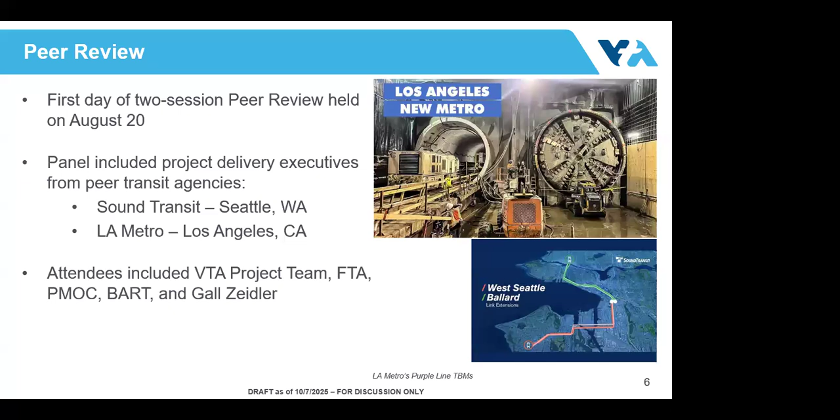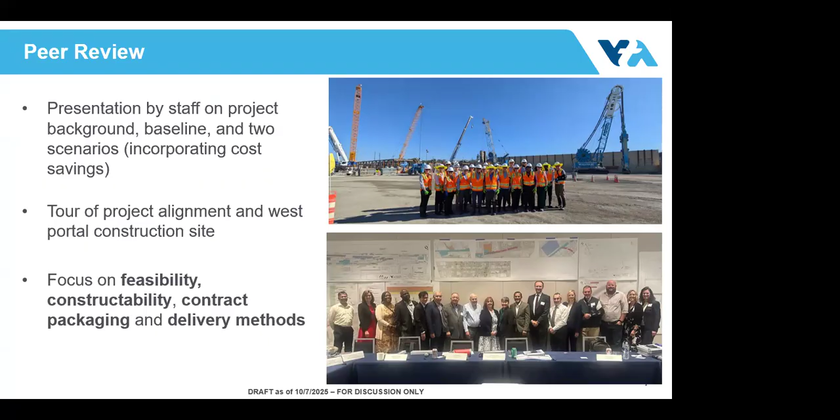We had a great time. We had presentations. We provided them with a lot of materials in advance. They were able to review and come with lots of great feedback. We spent a day and a half with them where they came the night before, and we were able to tour the West Portal site and go on a tour of the alignment. We walked through downtown, had dinner down at Gelatos, and then the next day, worked together in the office. You can see there on the bottom with lots of materials.

So I wanted to go through some of the high-level summaries of the feedback that we received there. This information will also be presented at our Oversight Committee meeting on Thursday. And in the agenda packet for the Oversight Committee meeting is the actual report, if you're interested in looking at it. And we can also send it to the group if interested, where that's linked on our website.

But as you may recall, we were evaluating two scenarios. Scenario one is a 53-foot diameter tunnel for the entire alignment. And scenario 1A was a 53-foot diameter tunnel from the west with a smaller 40-foot diameter tunnel from the east, where they would meet up somewhere just east of downtown.

So their analysis resulted in scenario one being the optimal path forward from constructability to feasibility and with fewer risks. We don't have to worry about where those two tunnel boring machines are coming together. Scenario 1A introduced the additional cost, an additional cut and cover box downtown that would then create impact where that meetup location would be, and increased risk and complexity.

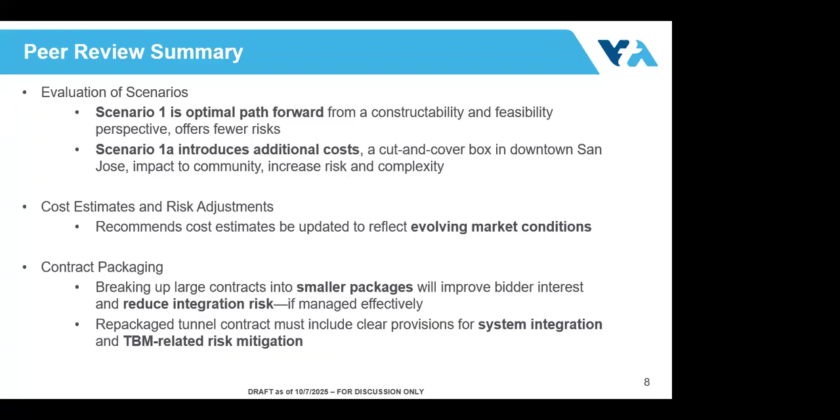They gave information and recommendations as it relates to cost estimates. As you can see here, contract packaging, breaking up into smaller contracts to reduce integration risk. Several different areas of feedback. And they also reiterated the importance of a strong working relationship between VTA and BART, which we agree is critical to the success of our project, and encouraged us to work together, maintain that relationship, and to continue the momentum with the construction underway.

So there'll be a more detailed description of this in our October 17th board workshop, where we'll have different representatives talking through in greater detail, but this will also be covered later this week.

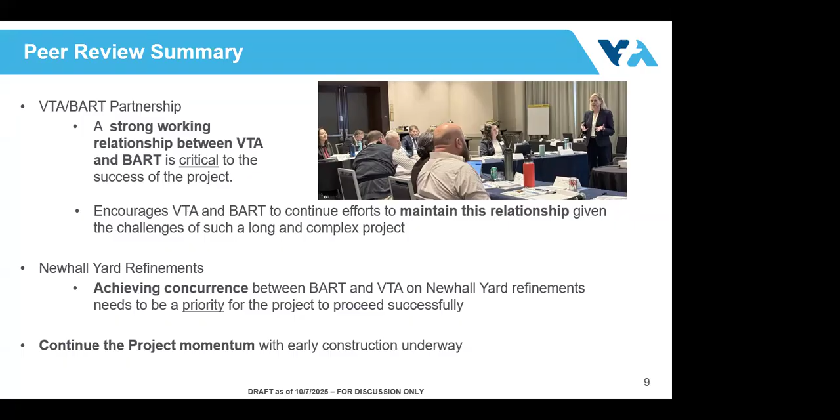I want to get into where we are in the cost savings status. We've been providing updates on cost savings we've been able to achieve. There's kind of four main areas remaining that we're still working through. There's some systems cost savings that we're still working through with BART.

The downtown station, as I mentioned in our interim meeting in August, and those of you who were able to come in September as well, based on where we had gotten at the time, we hadn't been able to achieve all the cost savings that were needed, and knowing that we were able to achieve significant savings by moving station infrastructure facilities above grade at the 28th Street Station and Diridon stations, that's why we ended up having to make that change here as well, because we needed additional cost savings.

So we're working through that, which Greg's going to talk about in a minute, working through refinements to the Newhall Yard with BART, and then landing on this project configuration, which path for the tunnel we move forward with, and then the resulting station. So we're continuing our engagement as it relates to those open items, and then today Greg's going to talk about the downtown station, and then I'll talk a little bit more about the configuration.

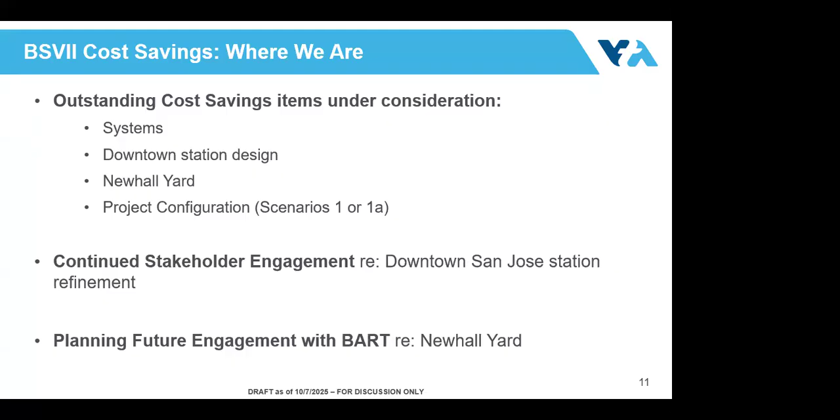Greg, over to you. Great, thanks. Thanks, Erica. Greg Thibault here. I've met most of you before.

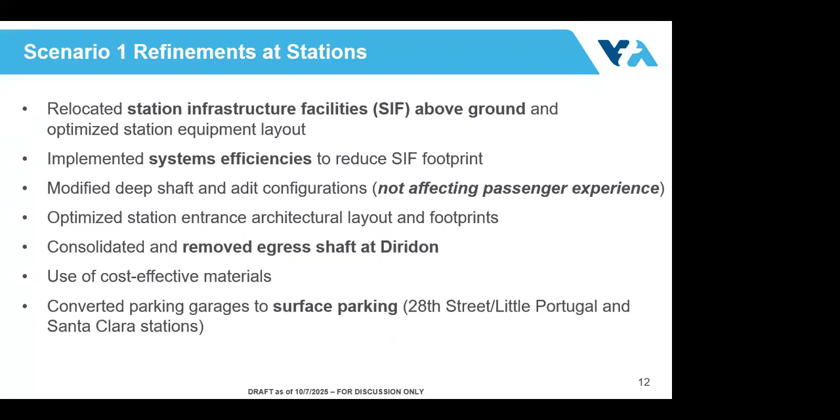So I'll talk a little bit about the downtown specific item. We have gone through and done a lot of these refinements at the various stations along the alignment, all four stations. Downtown was the most recent one that we've had to make some adjustments to. As Erica mentioned, we covered that in the last interim meeting. We do have some slides here to just reflect on that a little bit more. They are a work in progress. We do have a lot more work to do on the station design and the configuration, especially the finishes, and how those finishes look. But we've got some refinements in terms of the overall layout.

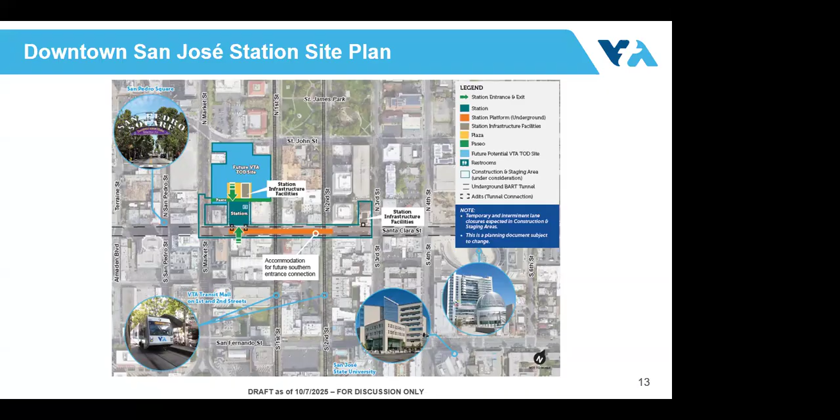So again, here's where the station exists. This is very close to where we're at today. The location of the station doesn't change. The station entrance from the ground level down to the tunnel does not change. The only thing we've been able to modify is some of the above grade areas, as well as eliminating the basement where we had a lot of the equipment previously. So that's one thing that I think I've got a slide on here.

So what we've done is essentially taken that basement structure that was on the north side of the station and stacked some of it on top of the existing head house. So the existing facility, we tried to make that as efficient as possible by adding some of that equipment right on top of the existing station. What that does do is add a second floor on the station, but it doesn't allow us to have that very, very tall roof that we had before, that tall ceiling structure.

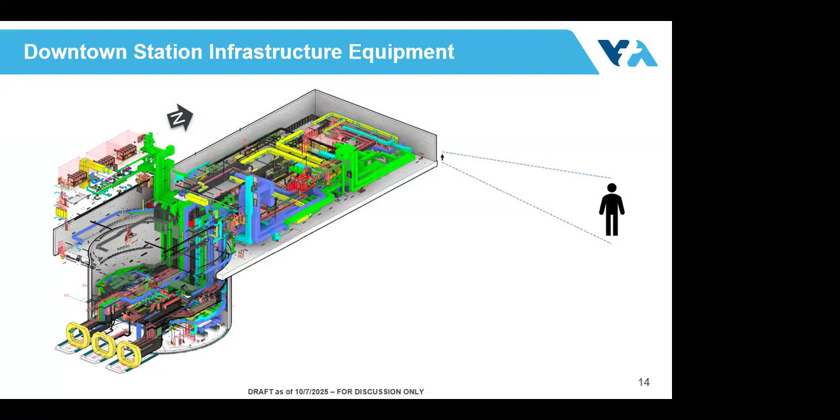So the next slide shows a little bit more detail. Again, this area here was that basement that we eliminated, which was a massive amount of construction just to build this. There was a lot of temporary works, soil nail walls, all of those go away. We bring some of that gear up to grade. So some of the heavier transformers and things come up to grade, and then a lot of other material and equipment goes on top of the station, and then we go with a 2-floor station configuration.

Again, the 2 escalator run scenario down to the concourse level does not change. So the passenger experience to go into the station and down to the actual tunnel does not change. We don't add a 3rd escalator. We don't make that drum any smaller. We just make the equipment and this station above a little bit more efficient by utilizing that same structural component to house a lot of this equipment that we used to have out in this basement area. So that's the fundamental change with the downtown.

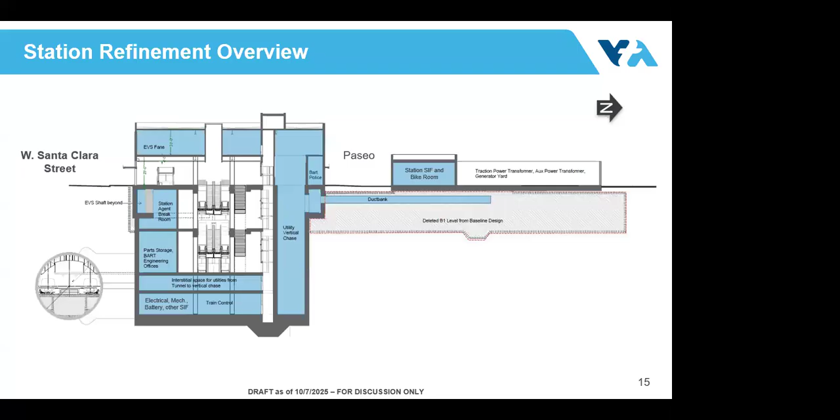Another thing we're working on right now is what this infrastructure facility looks like and where it would be located. We had previously shown it in a north-south configuration over here. We think it actually might be better with our future TOD development of the site to have it facing Market Street, and then have our public space on day one adjacent to this paseo. So this paseo opens up on day one. That's a non-drivable paseo, and that allows for passengers to come in and out of the station.

And then we'd have an adjacent public space as well as this at-grade station infrastructure facility. This is where some of that equipment that used to be down in that basement area would be relocated up to. We're still kind of working out the size of this facility. We're working with the VTA real estate team on exactly what that would look like.

There will be some public bike parking in here, whether it's on this corner facing Market Street or whether it's on this corner facing the station. We've got some options that we can work through on that. So those are some of the things that we're going to be working on over the next 6 months.

Yeah, Greg, are you thinking about still having a park or something above the? So that's when we had this station infrastructure facility in the middle. We really thought that a podium deck above would be the right solution, and that would be built out in the future by the development team who came in and did all the development here.

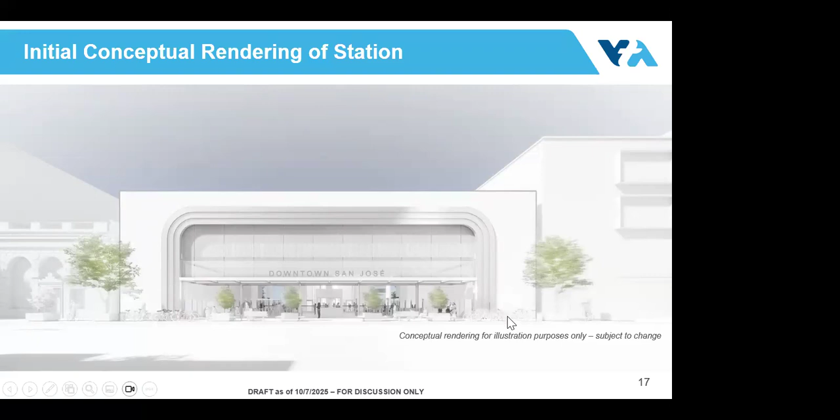Right now, the ceiling itself is about 18 feet or so from the ground level up. We're looking at whether or not that's the best distance. The room we're in here, I took a measurement, is 23 feet. So this is a pretty expansive room. 18 feet might be 5 feet lower. So an 18-foot ceiling is going to be a pretty substantial ceiling. Getting it a little bit higher is just going to increase the cost of the program. So we've got to be very diligent in what makes sense.

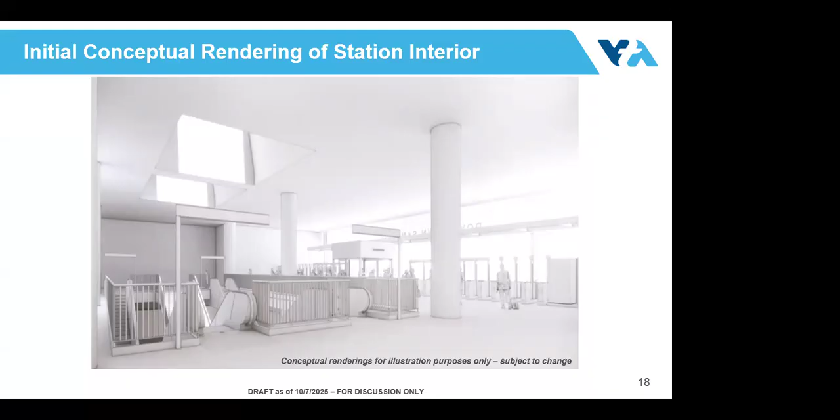So we'll take the next 3 months or so to hone our pencils, get everything a little squared, a little bit more refined, and then we'll come back to this group and be able to talk to you all about some of these decisions on the station facade, some of the materials, the exterior treatment, some of the things that we discussed previously. But now that we have this new vision, do we need to make some adjustments to those again?

What's the Milpitas height? Do you know by chance? It's pretty tall. Maybe it's in the 25-foot range, something like that. I think it's very tall because it's kind of a dual level. So there's one ceiling, and then there's the skylight, which is 5 or 6 or 8 feet taller.

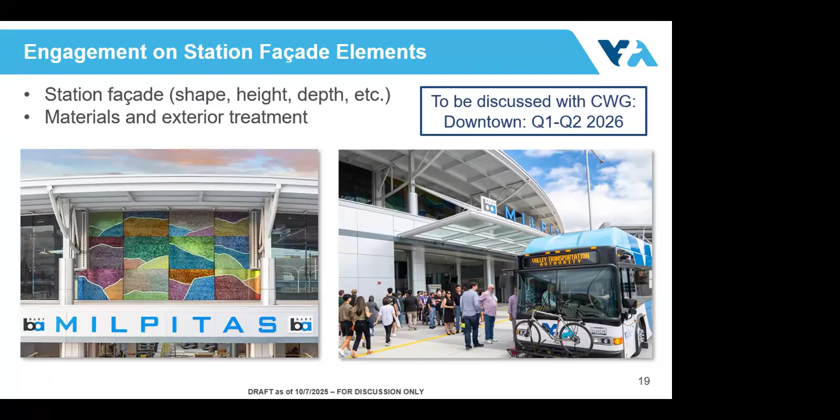Right. Very difficult to maintain. So that's one of the downfalls of having those things. But anyway, Milpitas is a pretty tall station as well.

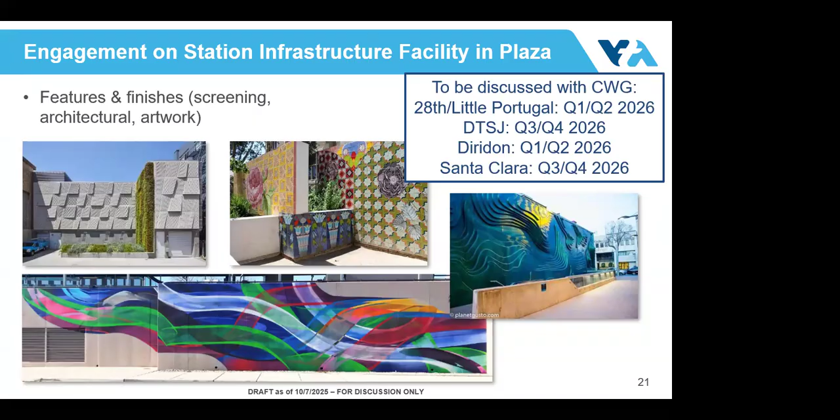I'm a little bit concerned now that I see this, with the impact of Market Street. You just got nothing active there. It could be pretty, but this is the downtown crossing, Market, Santa Clara. Within that block, you can have just not active space.

If you go back to the opening day slide - yeah, you get a good TOD, you can. It will be TOD adjacent, and then that green square is the bike parking facility, right? So there'll be that activation there, and then there'll still be the properties further to the north and south of the Paseo, as well as across the street.

Look at the photos, they look like they're much longer. Yeah, those are just examples of treatments, so that's kind of hard to show.

So the Paseo, I think, is about 35 feet wide. This would be about 60 feet or so, and then if we have this activation zone, you're really only looking at about 25, 30 feet of kind of a facility. And there would be some doors there too.

That's where we're gonna have some access points, and whether or not it is one flat wall, or whether there's some reveal, we can work through all that.

I'm having trouble visualizing this. Where is the corner across the street here? Where the bike parking thing is?

Yeah, so this is the identified place for a public bike parking facility. Greg, I think he's asking where the street corner is. Oh, the street corner's right here.

Okay, yeah, so here's Santa Clara. Here's the Santa Clara sidewalk. Here's our main station entrance. And there we would have a secondary entrance back here that all spills out into the Paseo. And then, as people come in, they can park their bikes here, walk in. There will also be some at-grade bike parking areas here, and then kind of an open, flat area here with probably some planting and planters and some different things like that.

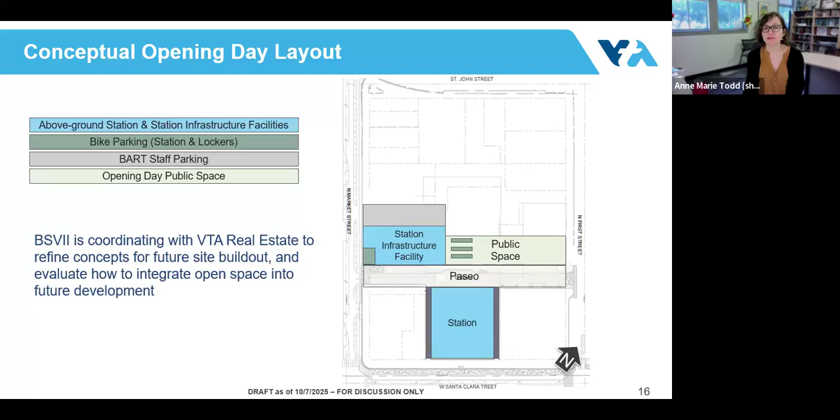I'm envisioning how I get there with my bike, coming from the south side, down First Street on the left-hand paseo. Santa Clara is horrible for bikes, right.

Actually, it's been some time since we talked, but Market Street is going to have a two-way bikeway, so that will be a new bicycle entrance into the block and into the station. So it makes a lot of sense to have potential bike facility.

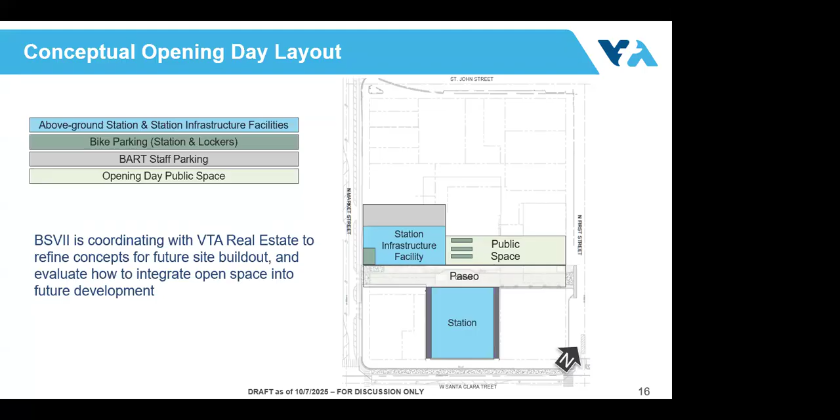But Santa Clara, San Jose is working on a vision for Santa Clara in the future. We don't know what that looks like yet, so I'm okay leaving that just for us. But yeah, Market's going to become a much better bikeway in the future.

What kind of traffic disruptions do you see along Market and North First Street while this is happening? Do you mean during construction, or during operation, or even after it's done?

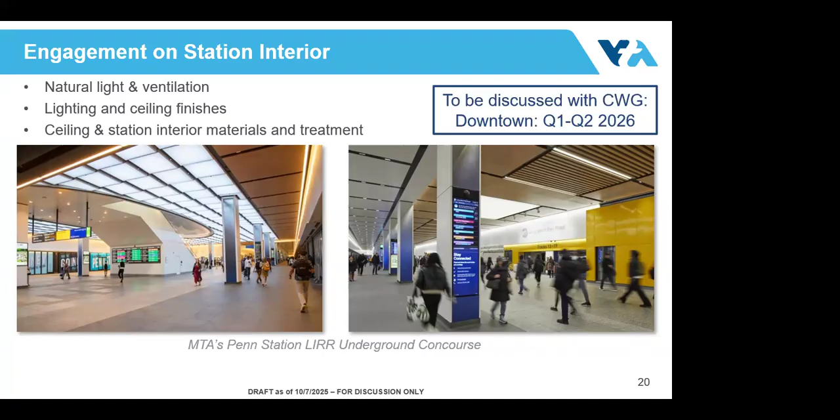Before we start construction in each project area, we develop a construction transportation management plan where we evaluate what the impact will be to traffic during construction. That's something we involve the community and stakeholders in. We started for the Downtown-Diridon area and we'll be picking back up again soon. That's where we'll get more information about during construction.

There is no BART patron parking here, so folks coming to the station are anticipated to either be transfers from rail or bus, or pedestrians and bicyclists, majority.

Is there a big drop-off place, for dropping people off at the station? We are working through where that is. There are some ADA pickup drop-off areas, but there is not a very large public drop-off for the downtown station. The 28th Street station has a lot of pickup drop-off, but downtown, no.

You can always park at the city parking garage right across the street. Plenty of parking over there, real close by.

The other thing is landscaping and hardscaping around the station building. This is just the downtown area. At Downtown Berkeley BART Station, we show kind of what could be configured there, trying to activate it as well. The plan is to continue engagement with this group, the city, BART, our stakeholders, and the VTA real estate team.

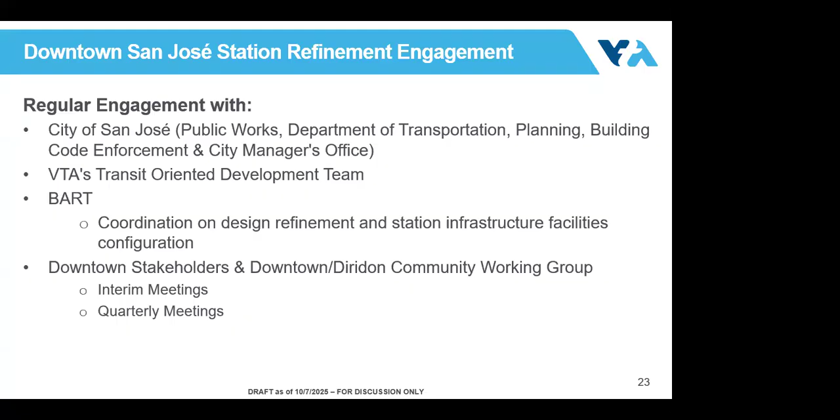Is landscaping and maintenance all VTA or BART? It depends. The drip line of the facility, everything inside the drip line, will be maintained by BART. Everything outside is by VTA. The drip line is kind of the roof line, the overall envelope of the building. Everything inside is BART's wheelhouse, and the things outside are VTA's maintenance staff.

Sidewalk, paseo, plaza - yeah, plaza, right.

Given that the pressure on the budgets is so intense, you've made a lot of great progress in reductions that are simply necessary, but you tried to elevate it. I'm very grateful for that. The confirmation that we're sticking with single large bore is absolutely essential to preventing destruction of downtown. There's a lot of price paid to keep the project on track, and you're making progress on that, so thank you. Yeah, it's a balance.

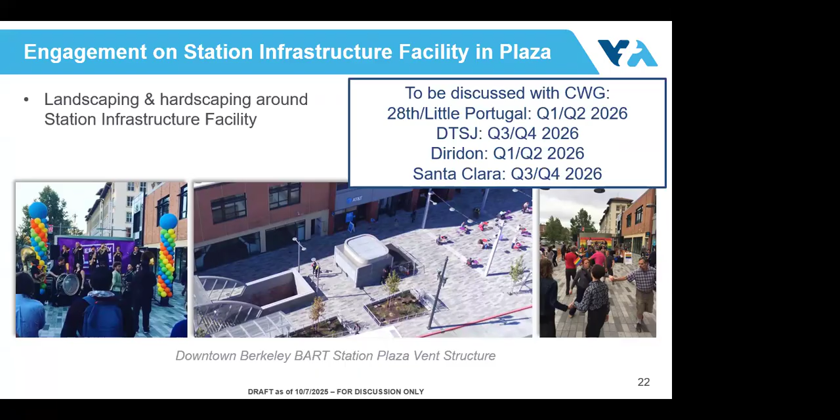I think Erica's going to talk a little about the two scenarios. We talked about the downtown station, and now let's spend a few minutes on the configuration decision we have to make and why that matters. We're going to decide between scenarios - Scenario 1A, which I'll show an image of in a minute, I described earlier.

Scenario 1A is concurrent. Once we make this determination, we'll be able to advance the project to our 60% design. It affects how we approach our tunnel construction, which is critical path, our ability to stay on schedule to maintain our projected revenue service date of 2037, and it provides flexibility on how to proceed if the FFGA is delayed by the current administration.

So we've been doing a lot of analysis, and we've presented to the board and to the community working group here on what the project team analysis has been. We went to the peer review. We're having that report out as well, and we've been engaging with Gall Zeidler, project management oversight committee's subject matter expert on all of these things to review with him as well.

Is the peer review the same people you mentioned earlier, the LA, the Seattle? Yeah. And who is Zeidler? Well, Zeidler is a firm that works for VTA's BART Phase 2 project management oversight committee, so it's a subset of the VTA board. So they facilitate the peer review meetings? They did not facilitate the peer review. They were there. They participated in the peer review, but VTA led the discussions of the peer review.

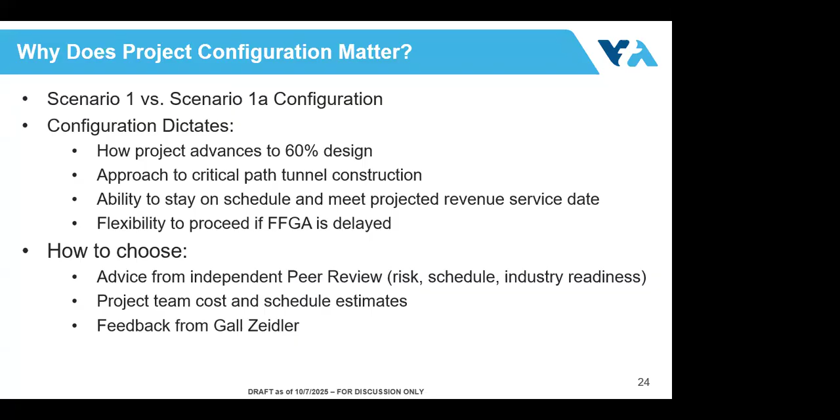So they participate as an independent subject matter expert for the board. Their contract is managed by our auditor's office.

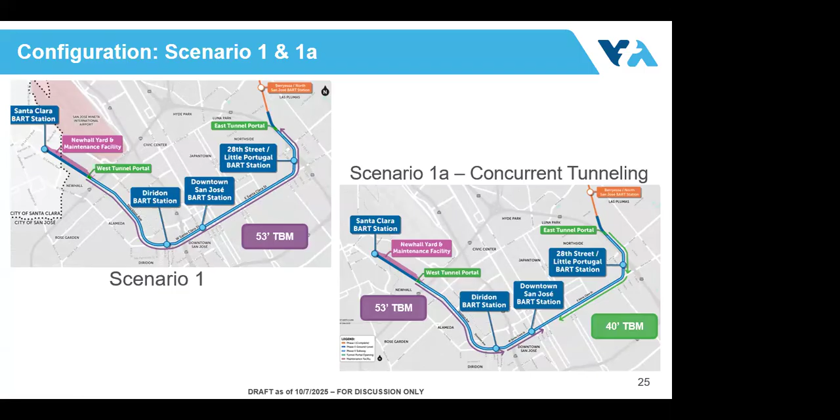Yes, thank you. And so reminding us of the two scenarios, scenario 1 is a 53-foot diameter tunnel the entire way. Scenario 1A is concurrent tunneling with 53 feet from the west and a smaller 40-foot diameter from the east. I know for a couple of meetings we've talked about what scenario 1A all entails, but wanted to pull it all together and remind us today.

So with scenario 1A, some additional construction considerations we have to take into account, which I'm going to talk about more in just a minute, is we have a new east portal launch structure that would have to be built. We would have to acquire an additional tunnel boring machine. The 28th Street Little Portugal station would become a large cut and cover structure to construct because of the smaller size of the tunnel there. And there'll be a retrieval shaft at the meetup location of the two TBMs somewhere along Santa Clara Street.

Retrieval spot, 7th Street? Yes, and I'm going to get to that in just a minute. So yes, somewhere between 3rd and 7th. Yes, and so...

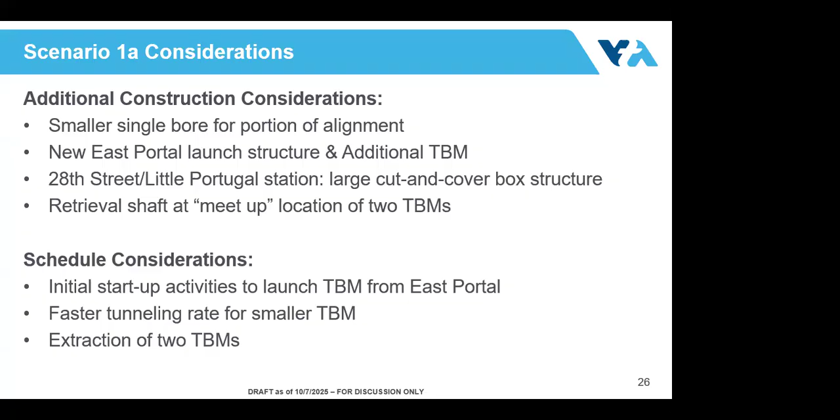Okay, and then as it relates to the schedule, there's initial startup activities that have to be done in order to launch the tunnel boring machine from the east side. There is a faster tunneling rate for the smaller TBM, but with one tunnel boring machine, you would drive the entire tunnel and extract the TBM at the end at the east portal. But with two, you have to extract both at the meetup spot, which then has the surface impact. So we'll never actually see the TBMs? They'll be underground all the time once they start working, right? Correct, yes.

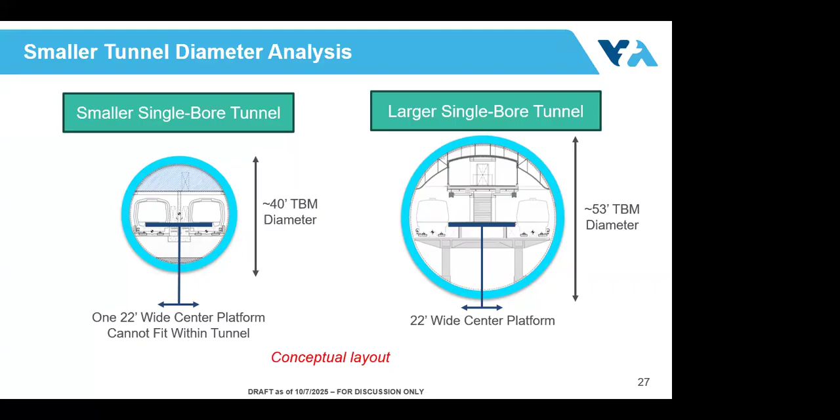So just to remind us of the tunnel diameter, the larger single bore tunnel on the right is where the platform fits within the tunnel. On the left, you see the platform doesn't fit within the tunnel, which is why we have to do the cut and cover structure for 28th Street.

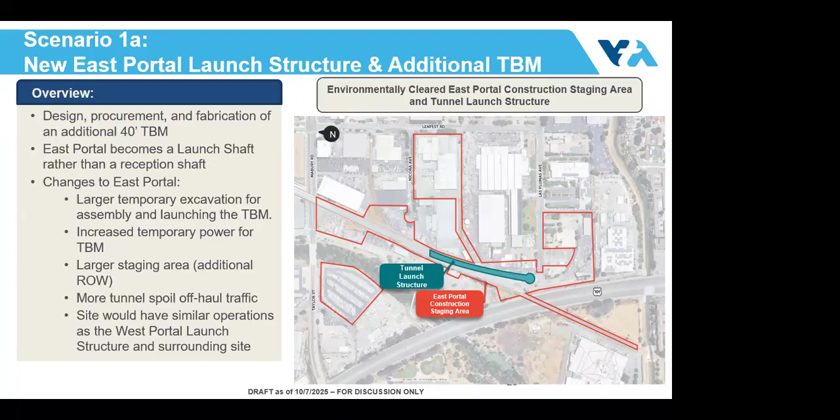So you can see we would need additional temporary power. We would need a larger excavation area, more staging area. We have more tunnel excavated materials that we would have to off-haul, and we'd have to bring the site up to what we're doing right now at the West Portal to prepare to launch, and design, procure, and fabricate an additional 40-foot tunnel boring machine.

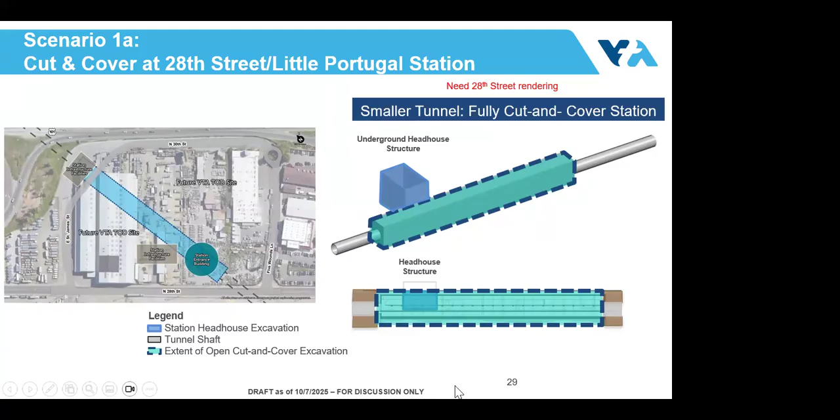So the rendering, the isometric view over on the right side, shows an example of an underground structure in that this is not 28th Street because it's not on top of the tunnel, but you can see in order to construct, there's a much greater amount of volume that has to be dug. It's a 700-foot long hole that you have to dig versus just the shaft and then straight down with the larger tunnel. So it's much more material, takes more time with this cut and cover construction.

Where does all the dirt go?

So that's something that we're working through, where the excavated material goes, depending on the material that's excavated from different stations or different facilities, not the tunnel. It's evaluated whether it's clean enough to be reused or sent somewhere else. The material that comes out of the tunnel is mixed with a bunch of conditioners in order for it to be able to go through the tunnel boring machine. So it comes out the consistency of toothpaste, and so it's harder to reuse that material. So right now there's extensive studies going on if that's something that we can reuse for the Salt Ponds Restoration Project, or different locations where it's taken to different landfills. So that's something the team's evaluating right now.

Do you have an idea how many tons of earth will be moved? I think it's 3.5 million. I think it's yards. Yards. Yeah, cubic yards. 3.5 million yards.

Yes. ChatGPT to convert that for you.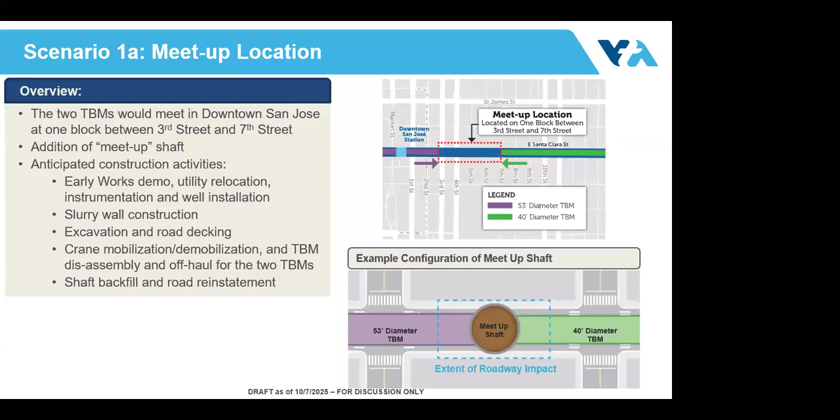When you started first looking at this probably 20 months ago now, we were all the way on 13th and started kind of migrating into downtown. This puts us smack dab downtown. Yes, this is in downtown, and there were some questions from the board that we're gonna be covering at our meeting on Thursday. But the team's still finalizing today, so I wasn't able to put it into the deck today. But looking at if we moved it to 13th now, knowing what we know, what would the schedule offset be? Say you have perceived that your costs would go up because you wouldn't get the ideal schedule. Correct. So this is the ideal schedule. Yes. Was there an approximate schedule savings of doing it? Yes, I'm gonna get there in just a minute.

When the TBMs meet, do you take them apart or do they back out? How does that work? You take them apart. There's certain pieces that get taken apart and taken out of the shaft there. So some of the pieces would get left underground, actually. They kind of just pull them, notch them over. And then the parts that have value, cutter head, screw, and things like that.

So then here I'm going to walk through the sequence of when the tunnels were launched to see where they align. So when we launch the 53-foot diameter tunnel, we're further along in the construction of the launch structure. We have our tunnel boring machine; you'll see pictures of it later today. So we launch that, and we won't be ready to launch on the east side yet. The launch of the 40-foot tunnel boring machine would happen 10 months after the initial launch, and so the larger tunnel boring machine would be around Diridon by the time the smaller machine launches in the east.

What's the point of having the Diridon and downtown stations so close to each other? I think that there was even an additional station initially studied in the early days, several iterations. San Jose State. That's been on long. Yeah. And it actually makes sense. We got the multimodal transport, we got Diridon, and then you got that huge population office worker base at downtown. San Jose State? Yeah, San Jose State, so it absolutely makes sense.

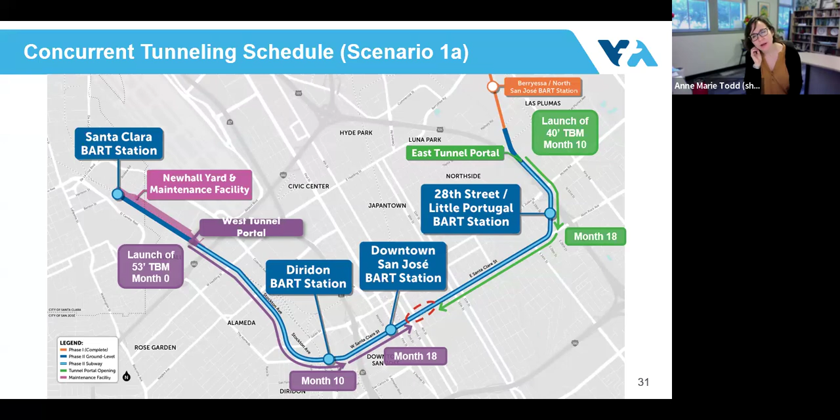I just want to quickly repeat a comment Anne Marie is asking. Did you want to unmute and ask specifically your question about SJSU? Yeah. Some of the speakers are a little hard to hear, and someone was making a comment about San Jose State students, and I just couldn't hear everything about that question. So if someone would mind repeating that, that'd be great. Chris, go ahead. I'll see if I can say it a little bit louder.

I'm going to try to summarize 10 years worth of conversations into 30 seconds. A lot of discussion about where the second station was placed in San Jose. Diridon made sense to everybody, but there had been a large contingent of people thinking that San Jose State was the real driver of population that'll be using BART. So could this have been brought closer to City Hall to make it easier for San Jose State students and staff to participate? And eventually, community decided that it was going to be directly in downtown. Great, thank you. Appreciate it. Absolutely.

Okay, so when the large diameter machine is at Diridon, the smaller machine is launching. And by the time the large diameter machine gets to the meetup location, the smaller diameter machine is only just past 28th Street, Little Portugal. So it ends up arriving 7 months later at the meetup location. Because there's all these initial capital costs for the additional launch structure at the east portal, the tunnel boring machine, the larger cut and cover, and the meetup, we would have to receive a lot of schedule savings to offset them and make this viable, which we are not seeing with this option.

What was the purpose for month 10 though, to start the 40? Why couldn't it start much sooner? Oh, for the East Tunnel Portal to start in month 10. That's part of what will be in the presentation this Thursday, because we have to do the environmental clearance. We have to procure additional right of way. There are several different activities. Before we can launch, we have to design, fabricate, and procure the tunnel boring machine, all these things that have to happen before we're able to launch there. So that's a great question that was asked before, and that's being pulled together right now.

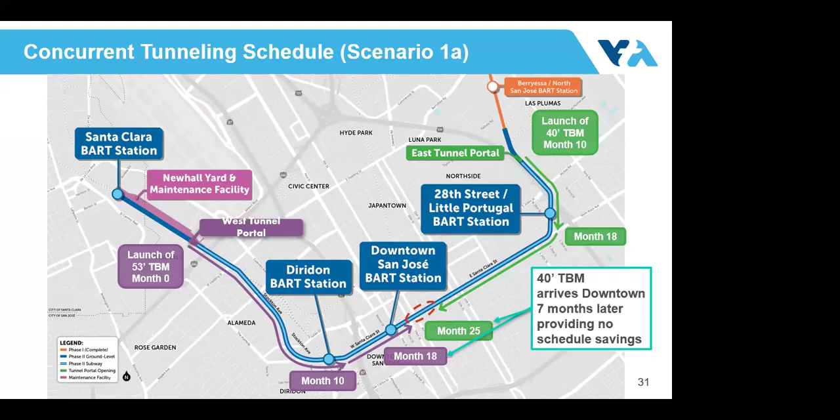So as such, we have a board workshop on Friday, October 17th. We'll be asking the board for direction on the project configuration to move forward with the scenario 1 configuration with the large 53-foot diameter tunnel the entire way.

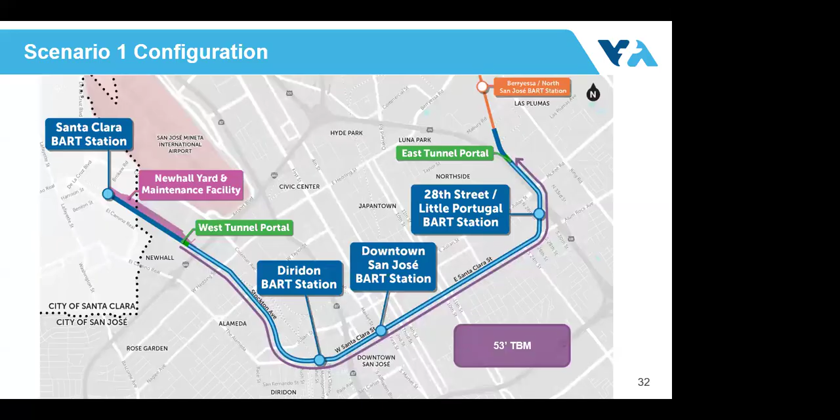All right, now Brent's going to give us some construction updates. Any final questions on scenarios? Folks online as well, any questions on the scenarios? Heading into the summer, there was enough concurrence by BART in particular that one is the right way to go forward. Coming out of the August efforts, are they all aligned with VTA that this is the best method? Yes, so we have been having meetings with BART and progressing the conversations as it relates to the yard and the systems facilities, but the configuration there was not a disagreement on.

There wasn't, okay. As far as the tunneling, they were not entirely on board with the 40-foot diameter tunnel, so this is actually BART's preferred option as well to continue with the 53-foot diameter tunnel. The GC has the same. And then, as it relates to Bellwether, there have been several meetings where we've been evaluating and having detailed conversations, working through what our analysis showed. And so we're still working through that together. There was a meeting that happened today. So they're still progressing on that.

Consider, if the discussions go the way VTA wants, there'll be enough savings identified that you feel comfortable that the rest of the money you may need to save, you could get that through the rest of the contract negotiation.

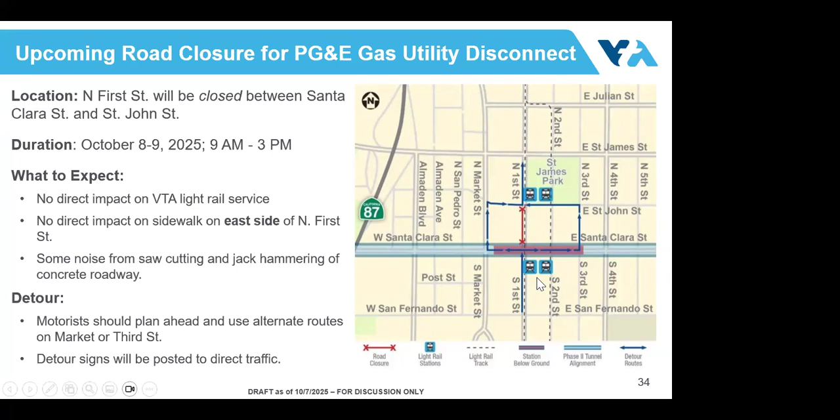This used to be an old courthouse building. Before that, it was an office building. It's facing First Street on the VTA block that Greg was talking a little bit about. But this building needs to come down. It's really in bad shape. It flooded years ago. There's a lot of issues with it.

Next week, we're going to begin inside the building doing some of the hazmat remediation that we need to do before the building demolition begins next month in November. So there will be smaller crews working inside the building. And then we're going to start most of our public outreach ramping up for the actual demolition when the excavators arrive on site. So we're anticipating in early November the demolition crew mobilizing.

We expect that to take them a week or two to mobilize, get their plan in place, and then anticipate about a month to two months of demolition work to take the building down safely. There will be a temporary sidewalk closure, although First Street will remain open, and we will be taking part of our lot for the demolition crew so that they can mobilize their forces there. Again, we'll be ramping up our outreach in the next week or two.

Working with our key partners, our goal is to get this down before the year end. We want to support the city's goal with these big events coming up, make sure that we have the building down, that we're being a good partner. And then once the building comes down, we'll be doing some minor paving and remediation work to make sure the site's presentable for our big events. So basically a two-month project. Two to three months, yep.

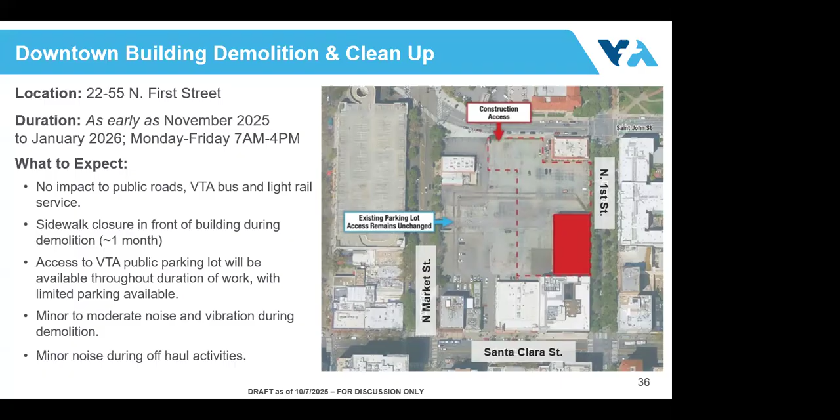All right, and then I'm going to go to another item that's going to be happening later this month. Our contractor is going to be doing a minor bridge investigation of a bridge owned by JPB. This is the bridge over Santa Clara Street. So we want to do some work in the street. It's going to take a couple of days. It will include a minor lane closure. Thank you, Chris, for letting us know that you have a big event the week before. So we were able to accommodate that request and push this work off another week. Very grateful, thank you.

So the notice you sent us, is that the old date or is that the new date? You know, Alan, we could get an updated one now that our date is changing. The notice that went out said as early as the 17th, which is a Friday. And so now we're saying as early as Monday, the 20th, we'll be doing it.

For our notification purposes, we like to give sufficient notification, but the team is still working through getting the permit from the city and things like that. So I'm not sure if we would be ready to start on the 20th, but that would be the earliest we start. When you get the exact dates, let us know. Yeah, we can definitely let you know, but what you have for now still works. I did hear that request. So when we do get scheduled dates, we'll let our CWG know. I don't need to tell them when no-earlier-than dates change.

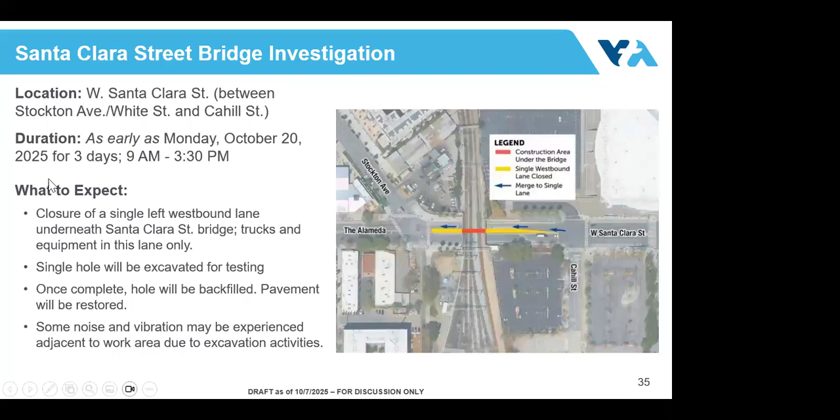This work's going to occur outside of the peak time, so they'll be setting up after the morning peak and then taking down. Yeah, so 9 to 3:30 is the expectation there. Expect it to take a couple of days.

All right, let's move to West Portal. Any other questions on those downtown items? Folks online, any questions? No online questions.

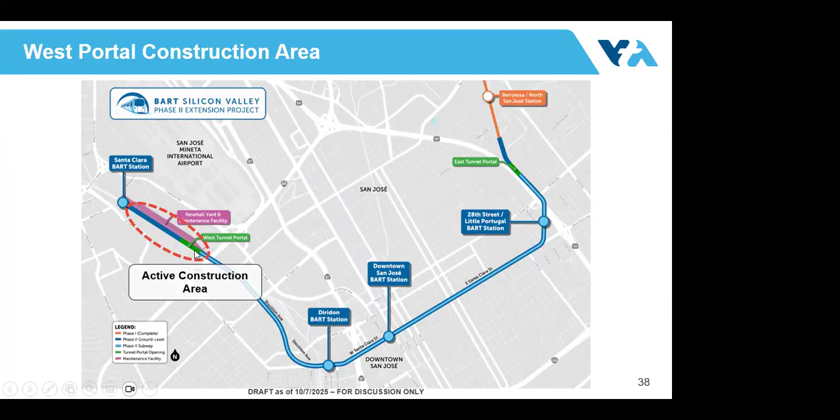All right, just to bring us into focus here, remember West Portal is located at our Newhall Yard near the future Santa Clara Station. This is kind of the general layout of the yard. I did want to call attention to this in comparison to the East Portal yard that Erica showed earlier in the presentation. The main difference being that the West Portal is in a very different environment, right?

It is really kind of behind a lot of our stakeholders. It's off a lot of local streets. And there's a lot of different things at play at the East Portal, there are other things we'd have to consider at the East Portal with that scenario 1A option. So I just wanted to bring that up before we jump into construction here.

Will trains stay there overnight? This will eventually be the place where we store trains, do maintenance. There'll be locations for BART workers out here. So what you're seeing on this map is kind of a layout of how our contractor has envisioned delivering the West Portal and the tunnel. So there'll be facilities here to build the lining segments. We will be storing some of the muck here temporarily before it gets off-hauled.

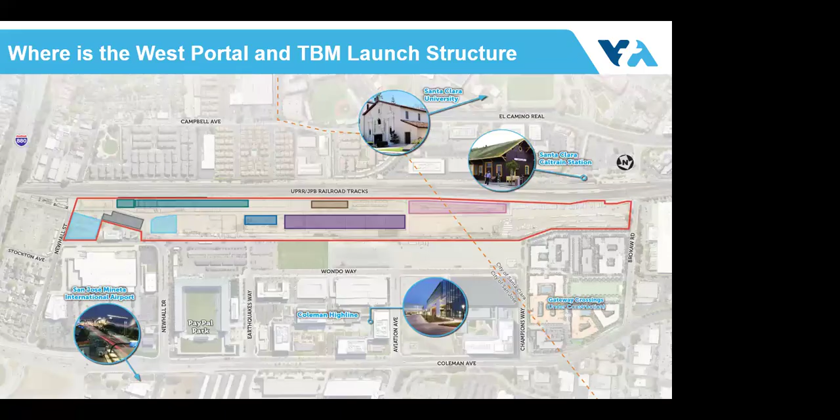The structure we're going to talk about today is this top one in kind of green turquoise. That's what we call our launch structure. That's what we're constructing right now. We wanted to show you all some of the progress that we've been making. There we go. The launch structure in 3D. Really a big engineering feat.

On the left of this structure, you kind of see this rounded part that we call the caterpillar structure, because it kind of looks like your friendly caterpillar from that book we all used to read. And in the middle of this structure, these are walls, panels that we are literally building underground. These have a lot of rebar structures. We're essentially building a big bathtub underground right now. So you can't see it from the surface, but our contractor is making significant progress on these walls.

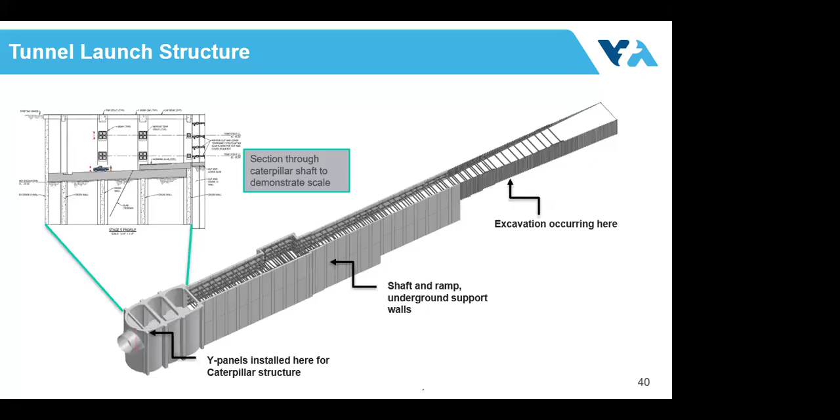And then to the right of the structure, to hold back the soil, we're using metal sheets. Those have all been installed over the last several months. They're about 60 to 70% of the way through constructing the walls on the middle section. And I want to walk you through next some of the photos for the Caterpillar structure, because this includes some pretty incredible pieces of rebar that our contractor's been installing over the last several weeks.

So these items in yellow and green, we call these Y panels. If you look at them from the top, they kind of look like the letter Y. At least that's what my engineers tell me. We've completed 2 of these. What this takes is digging 133.5 feet down into the ground, excavating all of that soil, building a rebar cage, which we lift up and place into that hole, and then we fill that hole with concrete from the bottom up. This entire process takes about a week to 2 for each of these individual Y panels.

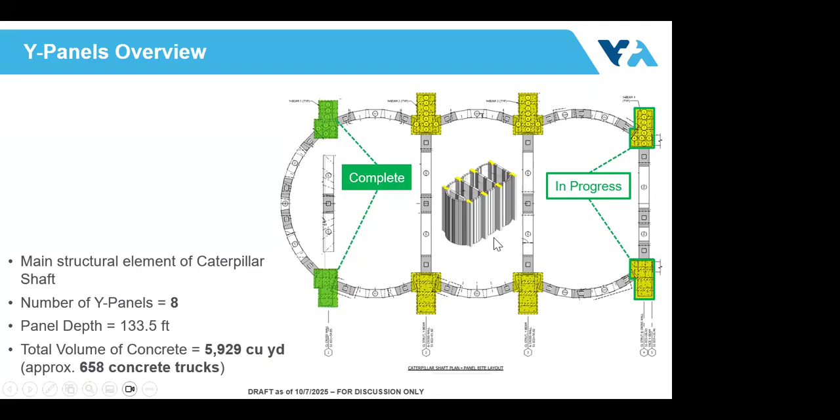We currently have one of the biggest cranes in the country working on site right now. The boom of this crane can extend over 300 feet. It can lift a lot of weight, and this is required to lift this really heavy cage. It also took another crane about half the size to build this crane. And how many trucks? 39 trucks to deliver all the pieces to put the crane together. So big crane required little crane to build, which is just really fun construction stuff.

Counterweight. Giant counterweight. What's that, James? How does it keep from tipping over? It looks so big. You can see all the weights on the back of it here. That's what all the specifications require to create that balance when we lift the rebar.

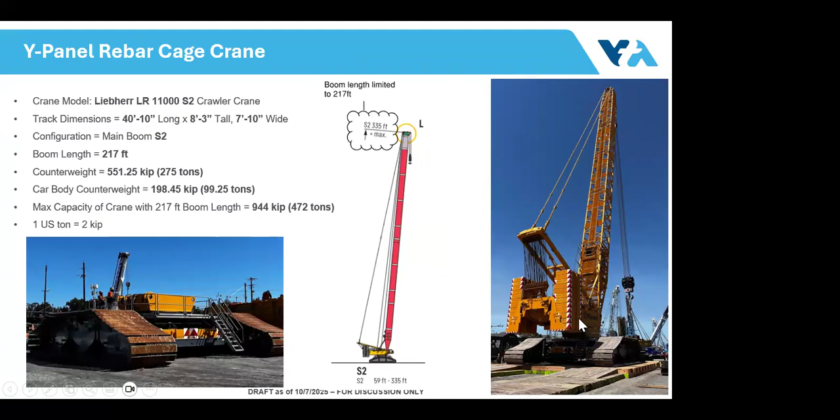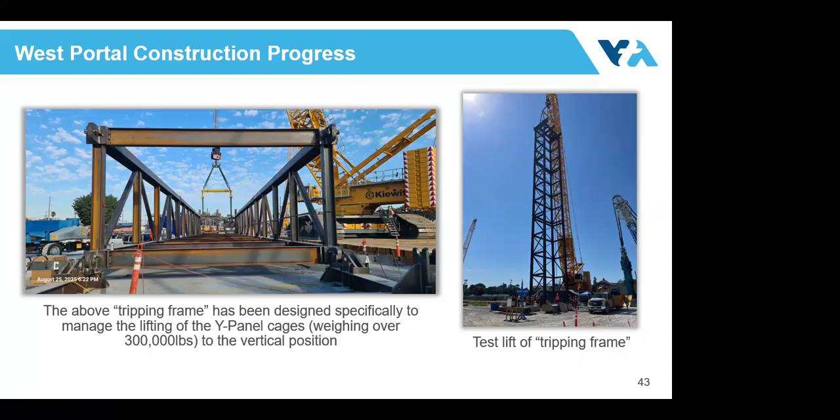So this is a frame that is being constructed. We have 2 of these on the site right now. Inside this frame is where they build the actual rebar cage that is placed down inside the panel. The rebar weighs so much that to lift it up in the air, we had to build a separate steel structure just to support its weight. So that's very unique. Our contractor, Kiewit, designed this unique method of lifting these cages.

Tip it up. Tripping frame. So there's a big structure on the bottom, where the cage is, the frame is connected to.

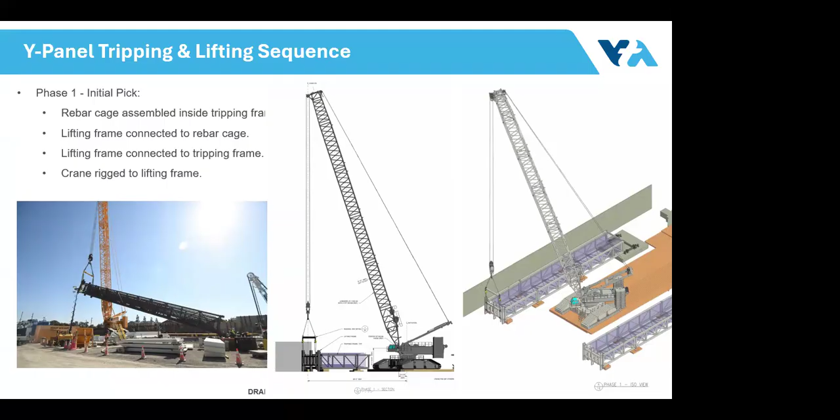The cage is built over a couple weeks in each frame, and then it's typically lifted before the weekend, and the lift takes several hours. The crane actually lifts it up, picks it up, and then it turns. We have a video for you too that we'll show you, which is really cool. You can see it getting higher here.

Each one of these rebar cages weighs as much as 10 fully loaded school buses or 26 African elephants. So it's a lot of weight.

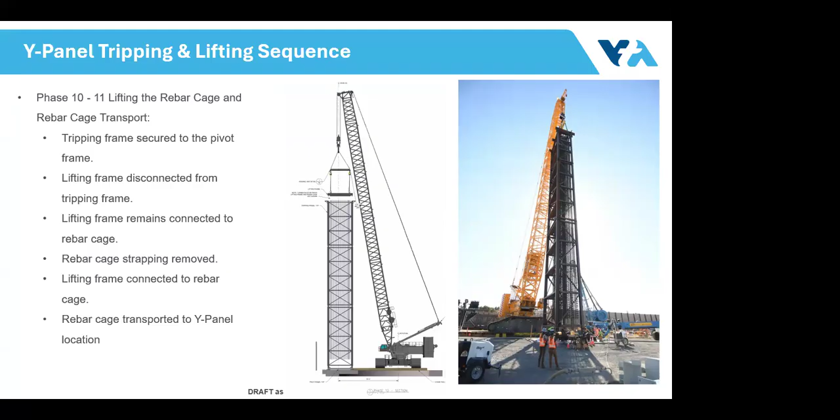And fully loaded school buses, how much do the kids weigh in that? Now you're really testing. A lot of kids.

So I don't know if I can play this video, okay. This is the sequence. This is our second Y panel lift that happened last weekend on about September 26th. So we'll play for you what this looks like. Sorry, I guess you can't. I'll play it for you. There you go.

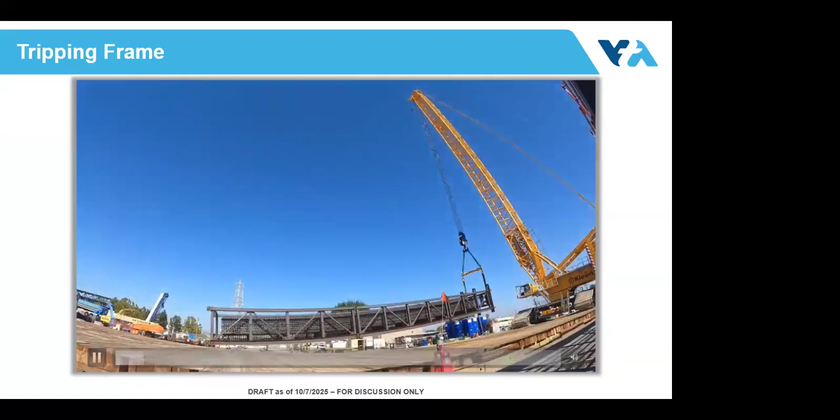You can kind of see the crane inch forward at the beginning, just slowly as it lifts. Good stuff. Picks it up.

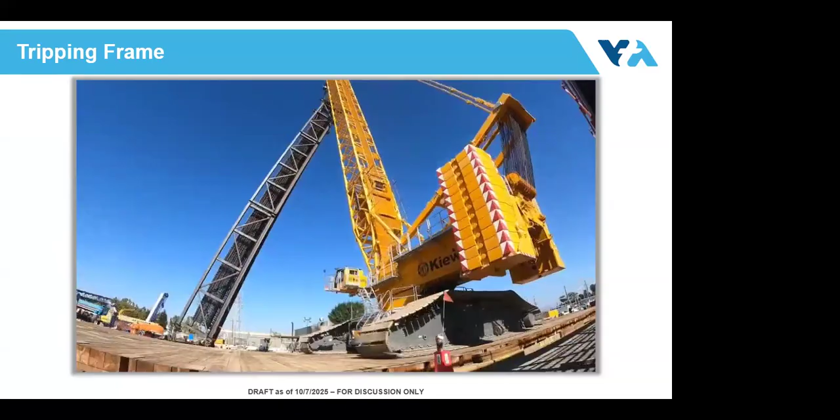Correct, so that's the next thing. The crane picks the rebar cage up out of the frame, and then places it into the hole after it's been tipped up.

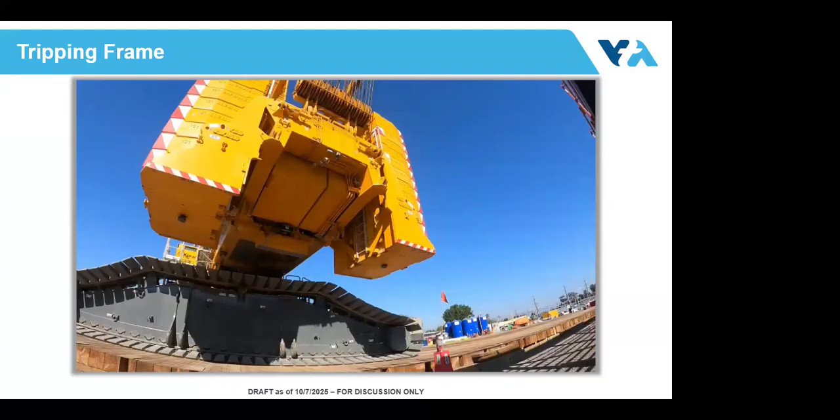Was all that steel and rebar American, or some from Japan or elsewhere? We're required to buy America for our project, for all of our steel, even though it's more expensive. That's the requirement. That's part of the agreement with FTA. Some of that does get reimbursed by the government as part of our grant.

So once you're vertical, then the rebar cage is self-supported, it's not going to collapse one way or another. And then you reuse the frame for the next phase. Yeah, so they've built 2 frames. They're kind of working in advance on one frame for the next Y panel, while the one they're lifting is in place. So they can be doing 2 things at once.

We've completed 2 of those. The third one actually got lifted today. So it's going to be placed in the hole tonight or early tomorrow morning. And then after it's placed in the hole, there's actually 10 to 12 hours of straight concrete pour.

That's how much concrete it takes to fill the hole. It's just a constant stream of concrete trucks coming to pump into the hole, and they start from the bottom and pump the concrete up.

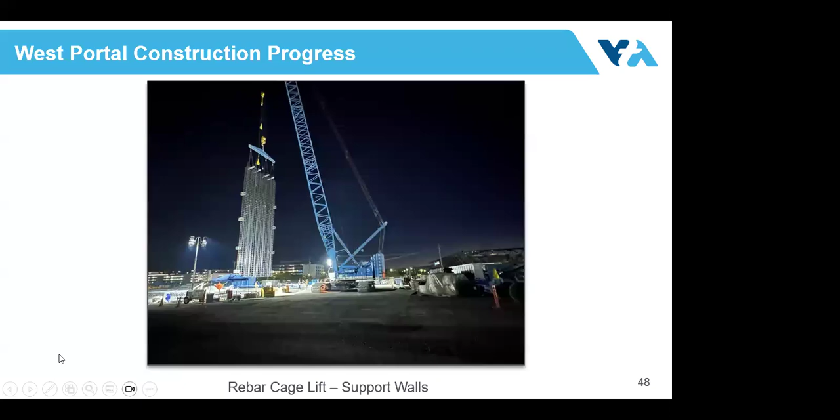Do you have the plant running on site yet, or do you get concrete from elsewhere? It is not running on site. This is all brought in on trucks right now. There will be a concrete plant built on site when we are constructing the tunnel liners.

What is the point of the rebar and the cage? Is that to stop a speeding train, or what? The caterpillar structure that I showed you earlier is the deepest part of the portal. As the train comes down, it's going to be at a level of about 80 to 90 feet below ground, but the overall structure goes well below that, to about 120, 130 feet.

So all the weight of the earth pushing on this structure is a lot of weight. The way that structure is designed, it's one of the strongest designs, right? That caterpillar shape holds back all of that weight, so it requires a lot of rebar, a lot of concrete.

This is the terminus point for the KST contract. They'll finish the caterpillar and the ramp, and then somebody else will take over. So KST are the whole launch structure.

They'll do the whole launch all the way down. So this structure alone, the value is about $500 million worth of construction value, just to build the structure, all the design and all the construction work going into it.

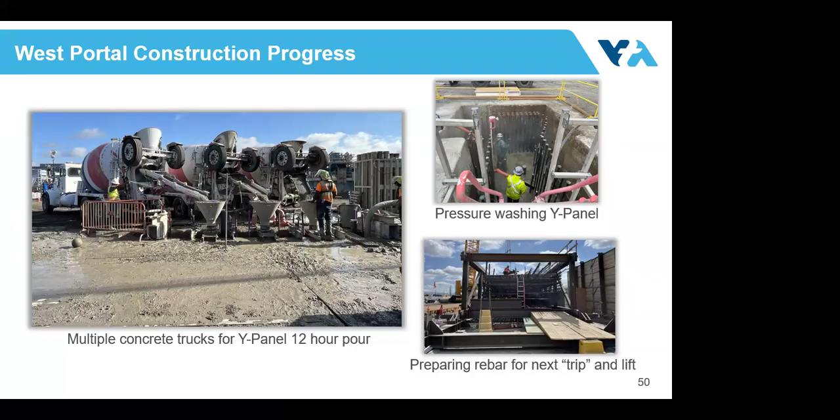Standing in front of the machine gives you some perspective of how large the tunnel will be underground. It's almost the size of a 4-story commercial building. So you take it apart, put it in ship pieces? Yeah, it will be taken apart, put on a barge, and shipped through the canal eventually to get here.

You'll keep it there until the full funding agreement's signed. Does that stay stored there and maintained? Pretty good shot. It'll be stored there for 18 months, until we're ready. That's a good picture. What's the power source for that thing?

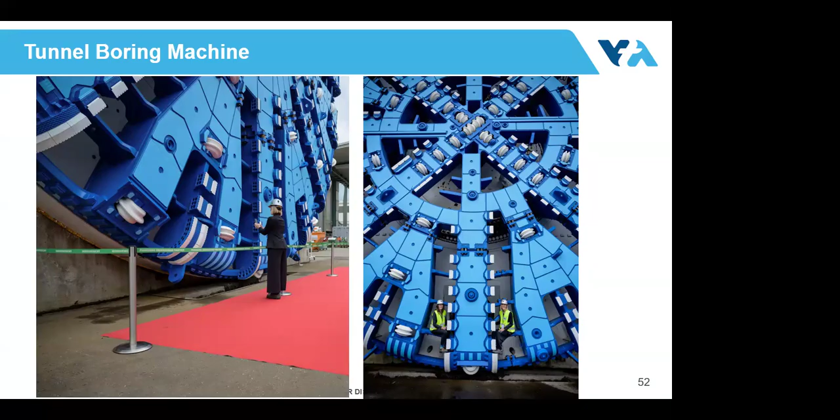How long is it? We saw the front there with the lady. Yeah, this is the last perspective here. I don't actually know that specific, it really depends on what you're talking about. The trailing gear can go all the way out to where the portal is. So you just keep going and they keep conveyor belting all the material that comes out to the front. Long extension cord, that's right.

So is it like maybe a foot a day, or how much? I think we're targeting 35 feet a day. We probably, as we get closer to the machine coming, we're going to put together a nice fact sheet or package on the machine. It's really an engineering feat, something really to celebrate. There's a lot of fun facts about it.

So James, that's a good question. We'll make sure to get questions like that. The whole naming thing. Yeah.

But when you're done, you repurpose it? So it doesn't get shipped anywhere else, you repurpose it? Potentially, again, the key parts of the machine may be repurposed, but most tunnel boring machines are considered custom-built. It's possible, Sarah, our construction director, says that when we're done with the machine, there may be a project needing a machine of similar size. We don't know that right now. But most machines are built for the custom environment under the earth, right? There's so many configurations to consider when you build a tunnel boring machine.

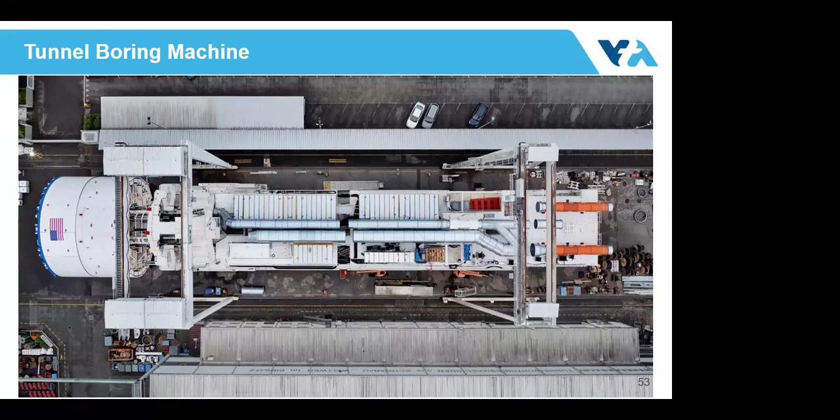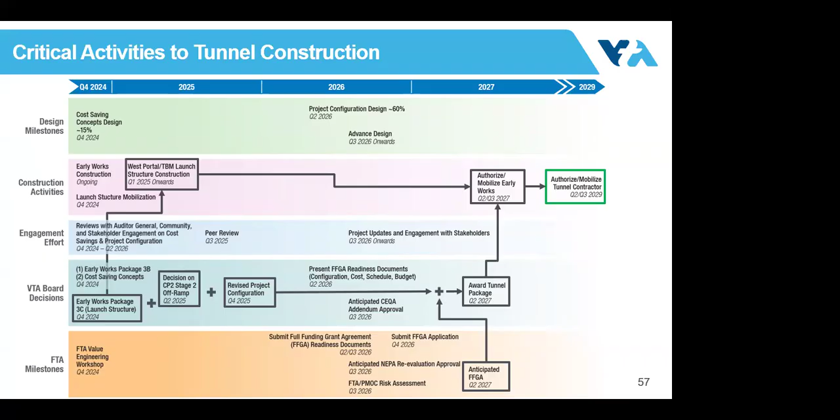I would say 6 months ago, a year ago, there was a very detailed presentation provided to the board, and we now have actual pieces. Yeah. Right.

Yes, and that's what this Q2 26 is, as we lock in the project configuration, VTA will be locking in the financial plan as well as we're getting ready to apply. And so that presentation of the documents will include an updated financial plan before we apply. So it'll be a similar level to what Adrian was talking about with the current. Can we get that, Adrian, online? Yes, we can send the link to you. That'd be great. Just curious to see.